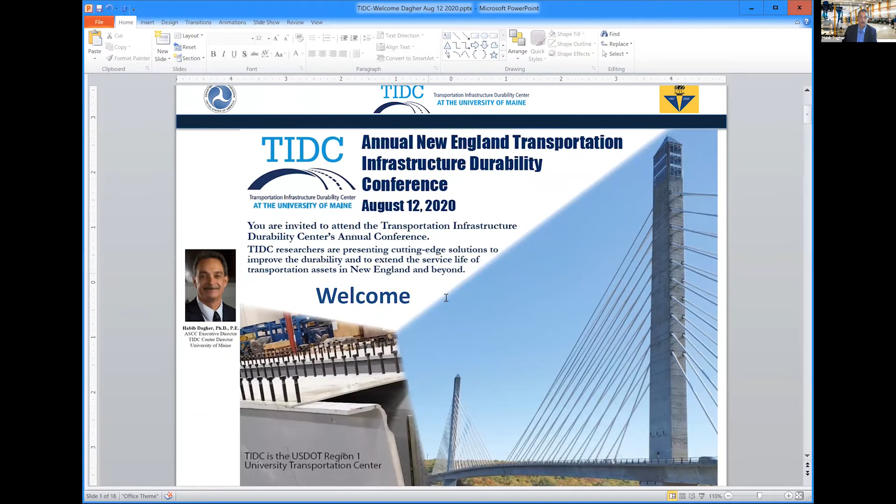The Transportation Infrastructure Durability Center was established in 2018 under USDOT Region 1, and it includes universities from New England as well as states from New England. So we appreciate the Department of Transportation support that made all this possible.

A bit about the center itself. It includes an advisory board as well as institutional leads. The advisory board is made out of New England DOTs, as you see from the Mass DOT, Maine DOT, Vermont, Rhode Island, Connecticut, and New Hampshire. And the chair of the advisory board is Dale Peabody from the Maine DOT.

So we appreciate Dale and the entire team's hard work with us. We are keen on making sure that the research that we do is relevant to the durability needs of the New England states and the rest of the country. So their role is very, very important.

We also have leads from each of the 6 institutions in this center. As you know, that's UMass Lowell, University of Rhode Island, UConn, Western New England University, and University of Vermont.

And within the program, we have thrust leads that address each of the 4 thrust areas we have in the program. You'll be hearing from the thrust leads throughout the day, and they will be managing the 4 sessions we have, the 2 in the morning and 2 in the afternoon.

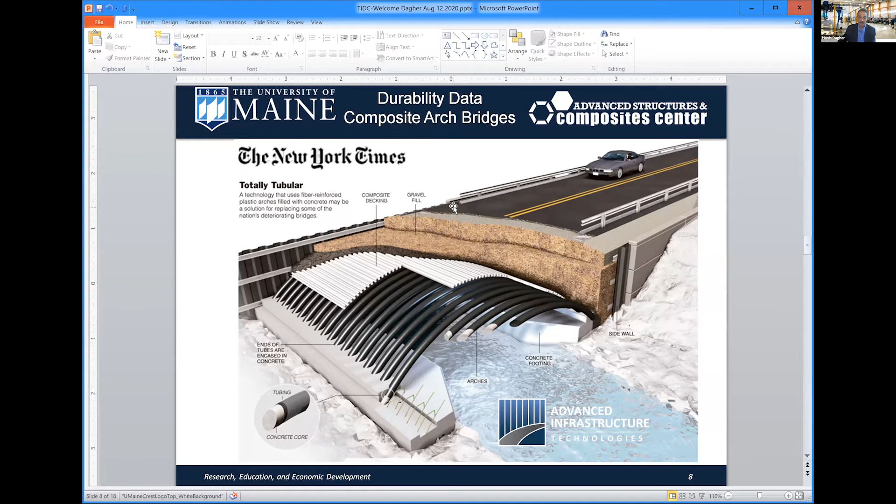We've built over 30 bridges using this technology across the country and outside the country as well, in a variety of environments. You could see in this case, these are the arches that you see in black under the bridge, and they're filled with concrete, and there's a composite decking on top that's backfilled with gravel.

So this is a treasure chest of data, and one thing I'd like our researchers within the universities and others to really pour over this data that we started collecting since 2008. That's 12 years worth of data on 30 bridges in a variety of environments, and study that not only today and tomorrow, but for the many years to come.

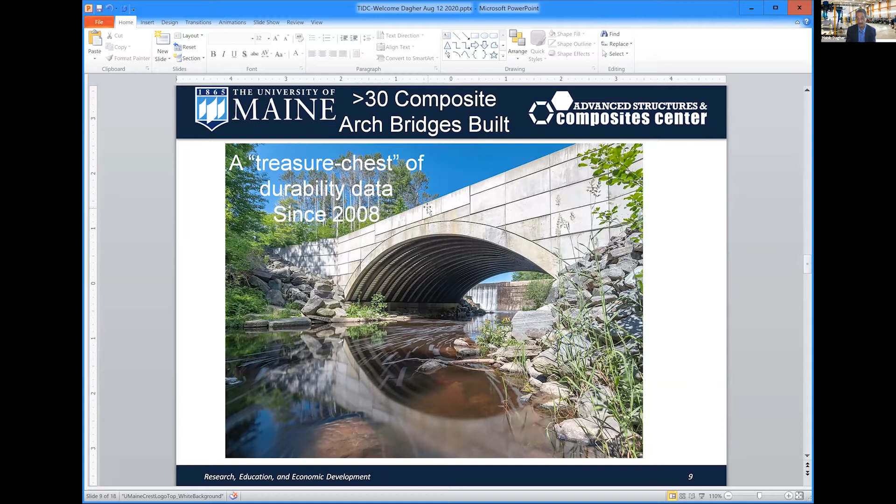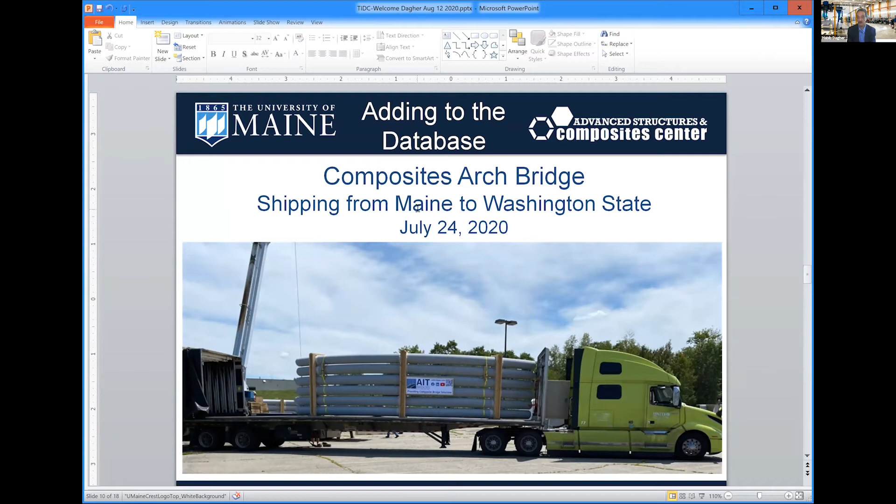This is what we're adding to that database. Just two weeks ago, this is a bridge that left the state of Maine on a truck. These are the arches, made in Brewer, Maine, and shipped to the state of Washington to build yet another composite arch bridge. So again, a treasure chest of data for researchers that we can pour over and go back and evaluate these bridges.

But we haven't only looked at arch bridges from a durability perspective. We have a lot of data also. Professor Roberto Lopez-Anido, working with the Maine DOT, have actually placed carbon fiber strands on the Penobscot-Narrows Bridge, and have been monitoring that since 2004. So one thing we'd like to do is continue this work and collect even more data on the performance of carbon fiber strands in this kind of environment.

So there's a lot of data coming in on composites durability, and as we build this database, we're going to have the ability to go back to industry and to DOTs and improve codes and standards as we collect this data. But we also have data on composites in the marine environment. This is a boat we built for the US Navy SEALs. It's an 83-foot-long high-speed interceptor, all made as one-piece composite, carbon fiber with a carbon fiber hull. So there is data also that we can pour over to help us better understand durability of composites.

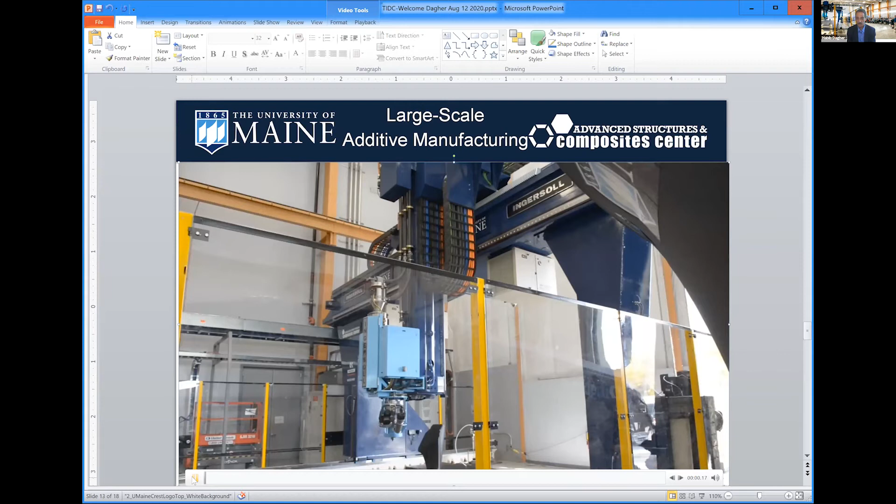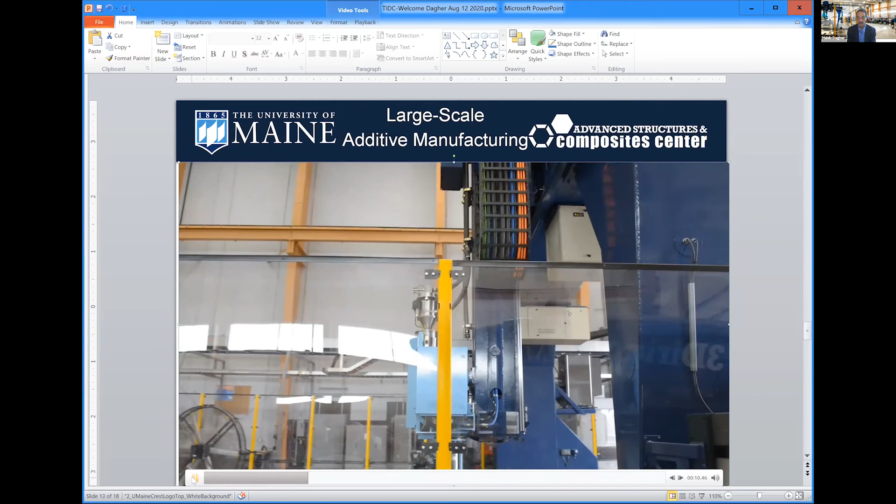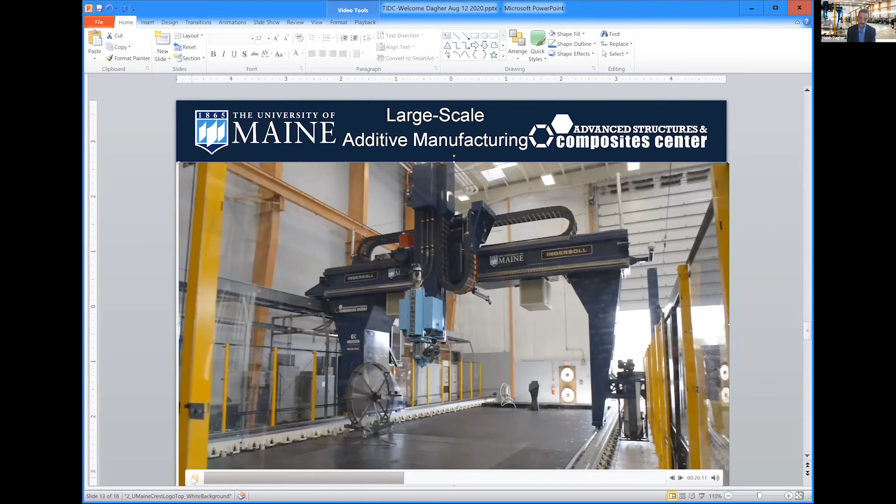But one thing we're really excited to work with you on, all of us, is really a new era of bridge construction and construction in general, using large-scale additive manufacturing. This here is the largest polymer 3D printer in the world, which we installed close to a year ago at the University of Maine. You can see a gantry crane system that holds the extruder for the 3D printer. It travels on a 100-foot-long rail system, and can allow us to print things that are 100 feet long, 22 feet wide, and 10 feet high.

But what's very unique about this is the printer head can be removed. This is an example of a boat that we printed last September, in about three days, a little over a weekend. It's a 5,000-pound boat, all printed in one piece.

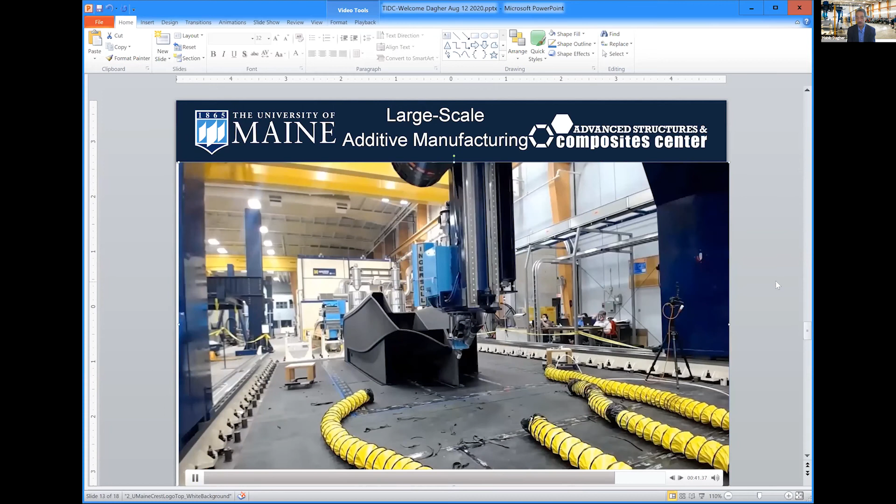Now think about what we could do in civil infrastructure with technologies like that. I'd like to challenge all of us to figure out how to work together to go in that direction.

Another technology we've been working on that's been commercialized recently is called the CT girder. This is a composite girder that we've developed at the university, tested and proved out. This summer, Advanced Infrastructure Technologies will be installing a 72-foot bridge in collaboration with the Maine DOT. That's a composite girder that's quite a bit lighter, about a sixth the weight of a steel girder, onto which you put a precast or cast-in-place concrete deck system.

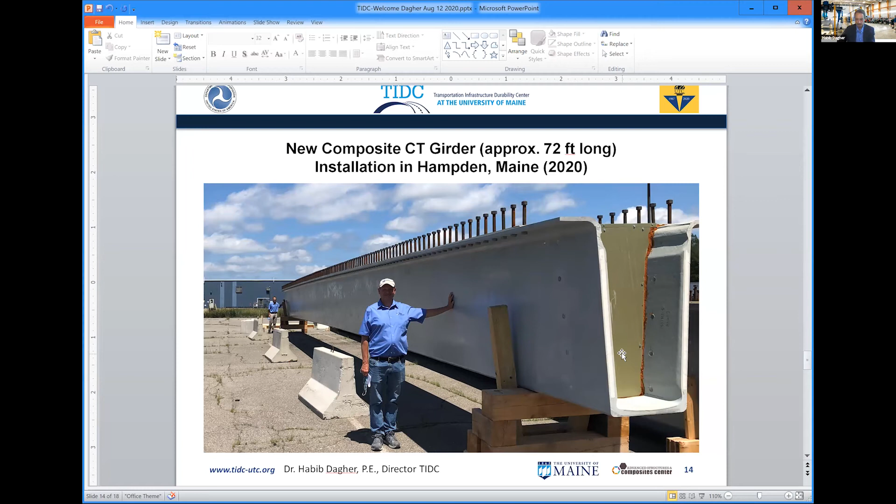So this is the bridge actually being manufactured in Maine, in Brewer, Maine. This happens to be a 72-foot mold, but you can see the bridge girder being pulled out of a mold, ready to be installed this year in Maine.

To give you a sense of quite an unusual method of testing durability of bridges, this happens to be one of our partners at the Maine DOT. He's a manufacturing partner from the Maine Department of Transportation who wanted to see for himself what the impact resistance of these so-called composite bridges is. So he took a sledgehammer to it, and I'll show you a big sledgehammer going after a composite girder. Not a very common thing to do, but it gives you an example.

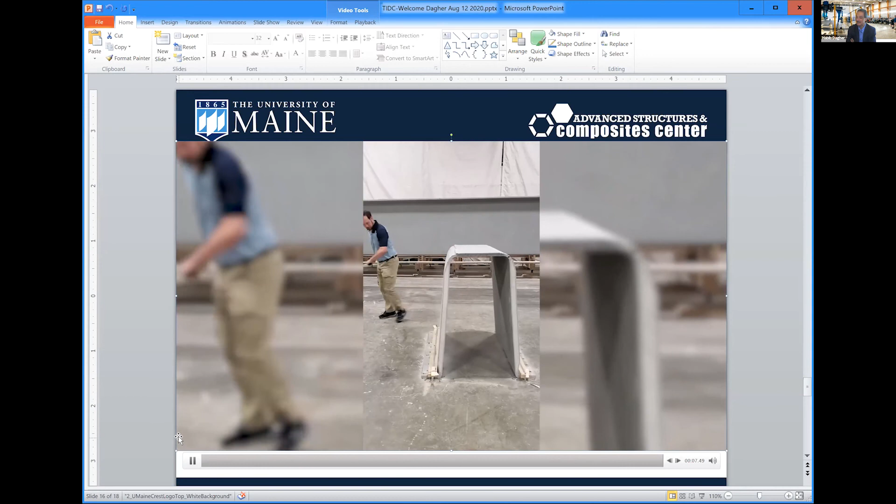It's important for us to get these bridges out there so people could see them, use them, and look for themselves. This is a sledgehammer hitting the composite girder, just a couple of months ago. Obviously, it did extremely well, and the DOT is very pleased. At least it did pass the impact test with just some paint scratches on the front.

But what's really exciting for us, going back to 3D printing, is that the mold this 72-foot girder has been built in could be printed. This is an example of a mold that we built for this girder. We 3D printed a mold independently of the mold you saw earlier.

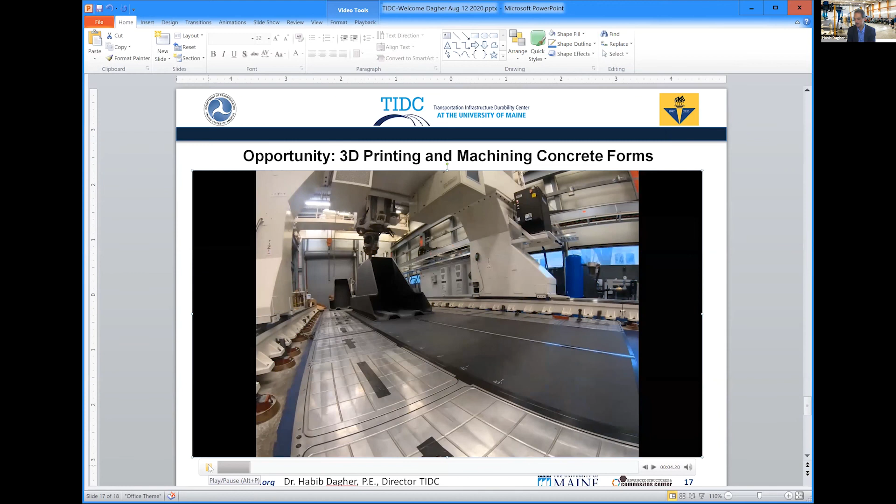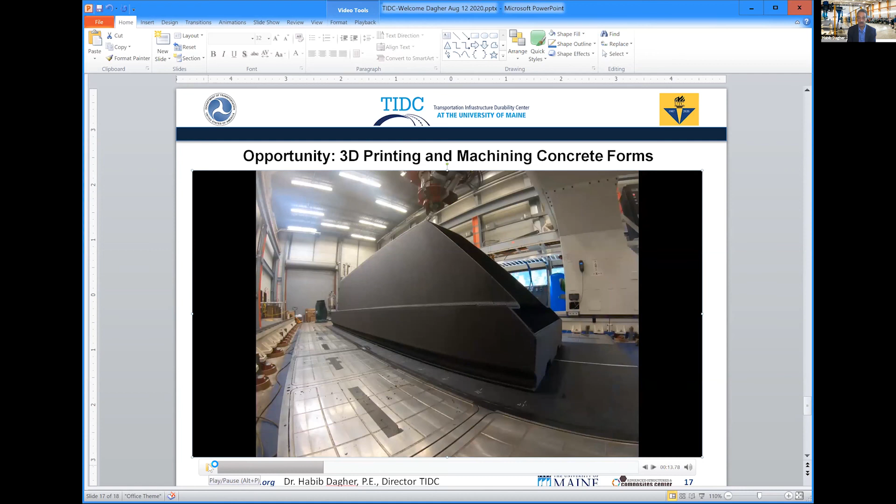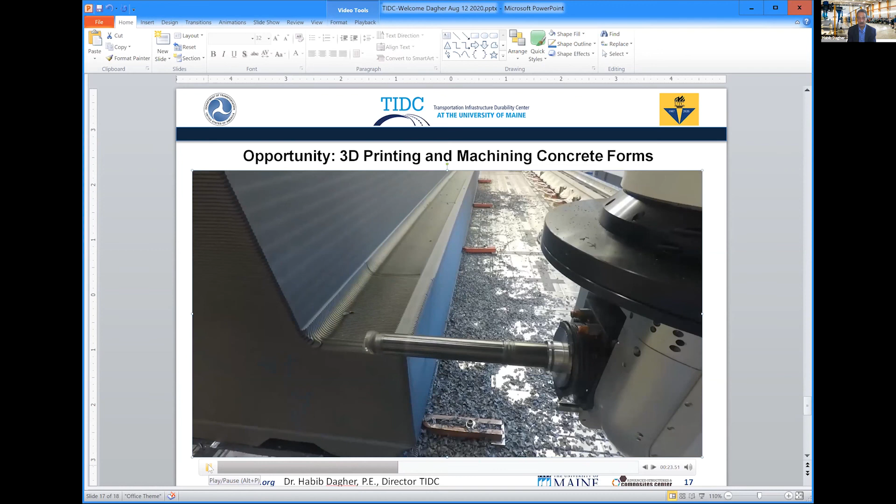But beyond that, think about what we could do with complex concrete formwork for bridges, for piers, and docks and others. This is being 3D printed—the mold for this particular girder. But this could be a form for concrete. The machining system, the printer we have, also doubles as a 5-axis machining system that can machine down to 5/1000ths of an inch. So imagine you can have very smooth formwork that's reusable and so forth.

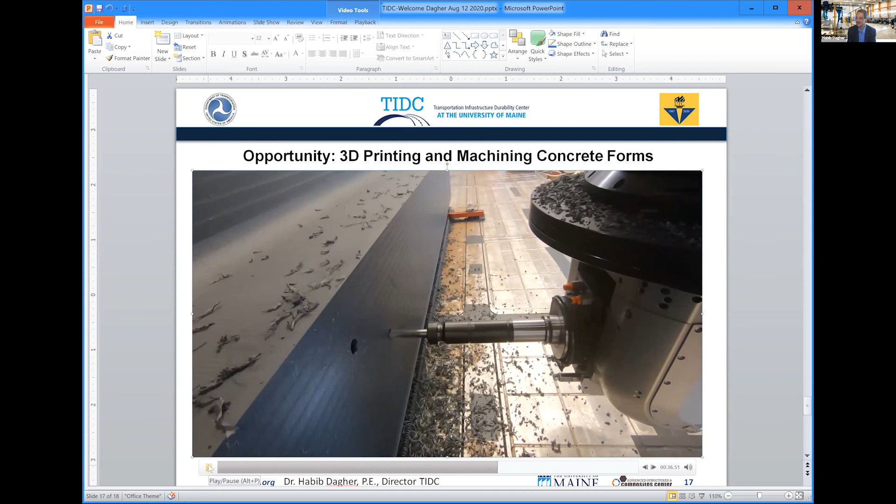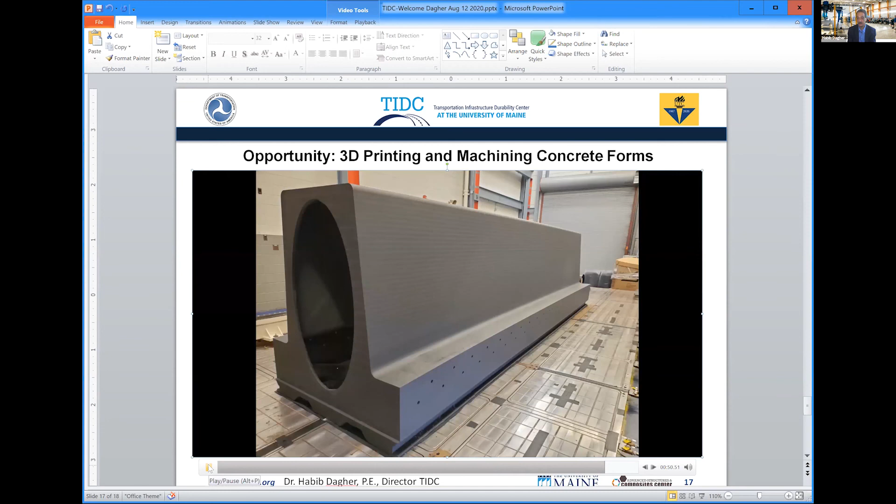So one thing I'd like to challenge all of us, particularly the ASCE and Jean-Louis—I know he's thinking about this—and other DOTs, is how do we get some of these demonstration projects out in the US before we get them anywhere else in the world? Let's find some places where we can actually utilize these new technologies, particularly for formwork. That's a low-hanging fruit for us to go out and build some formwork for complex bridges and show that we can do it a lot faster and get that done this year.